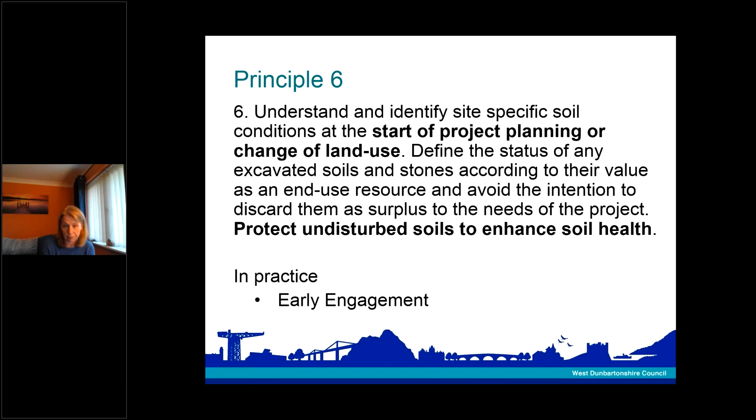The other principle which I think definitely applies in our sector is Principle 6. The initial plan when working on the principles was to include an infographic as part of the notes, but it was felt it was a bit too prescriptive, so it was taken out. But there are notes for each of the principles that go into more detail and explain more what this refers to. I think my biggest bugbear is that often we see material being excavated because it's not geotechnically suitable.

We then have the issue of this material then having been assessed to find a suitable use, or worst case, a use being found irrespective of risk. But with a bit more attention, it could be that this material could be treated in situ, and therefore there's no need for large-scale excavations in the first place.

I think the other thing is that with a bit more thinking, different material can be used for different purposes. The problem arises when the end use has not been properly defined, so all material needs to comply with the most sensitive end use. As a regulator, we're often accused of being the ones that expect the soil to be of the best quality. But the reason for that is because people aren't willing to put a bit of effort into where the material is going to be used. So we have to assume the most sensitive end use.

So wouldn't it be better to manage this - if a bit more thought about management and handling of materials would mean that different soils could be segregated for different uses?

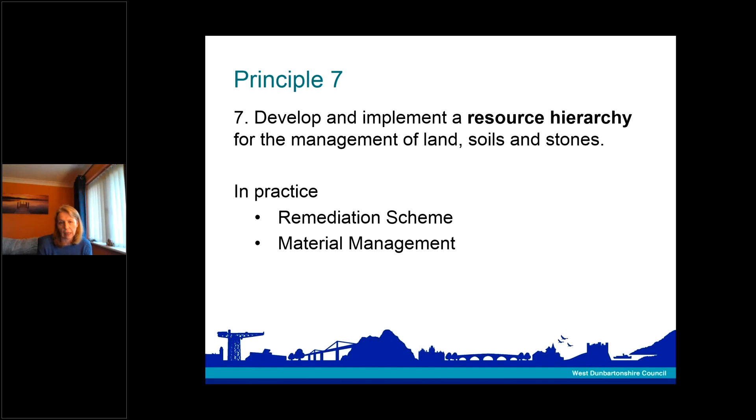I'd really encourage everyone to look at the 10 principles and identify where they think they can make a difference. So by way of conclusion, I bring you back to my rather bizarre title, Mountains or Molehills. The fact of the matter is, it doesn't matter - no matter how much soils and stones we're dealing with, we need to remember it is a resource in its own right. As a fellow colleague once said, we need to stop treating it like dirt.

I hope I've demonstrated how I'm trying to make a difference in West Dunbartonshire, and would encourage others to do the same. While globally our approach may be negligible, and even nationally we've still a long way to go, having webinars like this is a great way to spread the word, and I hope I've provided you all with some food for thought as to what we in the contaminated land sector can look to do.

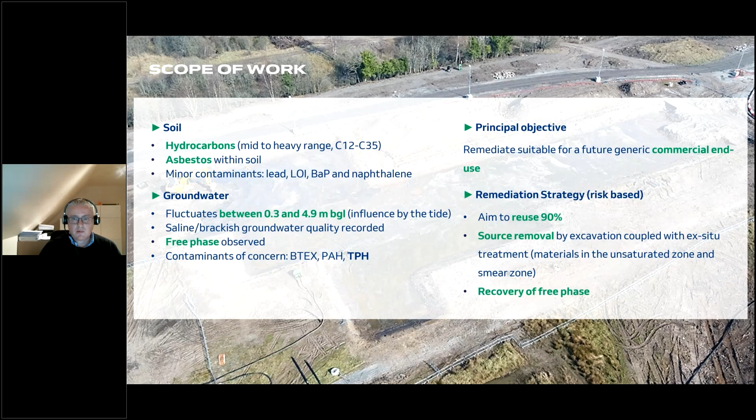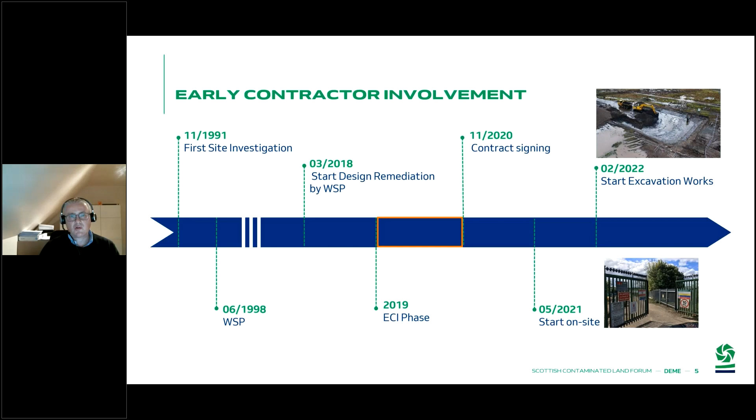Often today, contractors receive the tender documents, we have to price them, there are some discussions with the client, and hopefully we come to contract signing. This project is slightly different. In this project, we were awarded an ECI phase contract, an early contractor involvement.

A lot of you are probably aware of early contractor involvement. It's the involvement of the contractor in the design of the project, and we work together with the consultant and the client looking for the best way to remediate the sites. For example, we support the client with volume calculation.

As a contractor, we put a lot of focus on evidence-based remediation. What I want to say is that we want to prevent subjective criteria as much as possible, because in this project we had a visual criterion. But if we are walking on site together, for you soil will be clean, for me it will be dirty, and the other way around. So we want to make the criteria as objective as possible.

So we developed in the ECI phase some additional testing to make those criteria as objective as possible, and presented them to the authorities for approval. On site we have a hard criterion, for us about 9,600. And as mentioned, we also had a visual criterion. But by defining and developing the leaching test, we can now decide, based on the test, if a certain soil matrix needs to be treated or not.

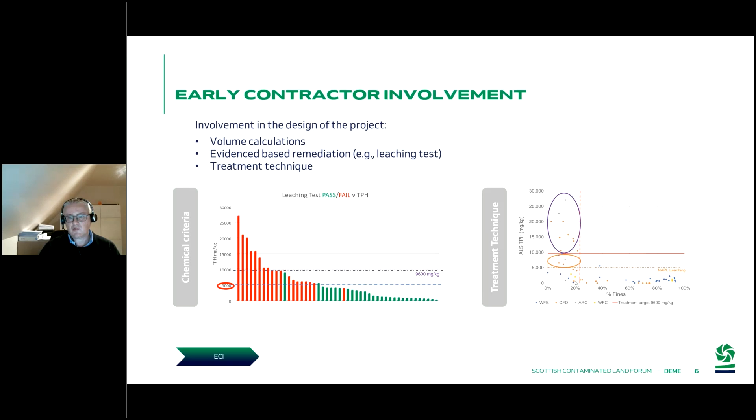Last but not least, we supported the client with choosing the optimal treatment technique for the works on site, doing additional testing on site. From that data, we could see that the pollution was mainly linked to soils containing up to 23% of fines. That was the fingerprint and the proof that a soil wash technique was the best or ideal technique on this project for the treatment of the soils.

Of course, we can promise a lot during the early contractor involvement, but during execution we need to verify, validate, and demonstrate that our processes and procedures are working, and working well.

So on this remediation project we have an on-site lab with continuously 2 to 3 full-time equivalent people working in it. I call it my R&D department. They are really the heart of the project. They do the sampling, perform the tests, and provide the operational team with the data, allowing us to decide in the evening or during the day what we need to do with the soils, if we need to treat them or what we have to do.

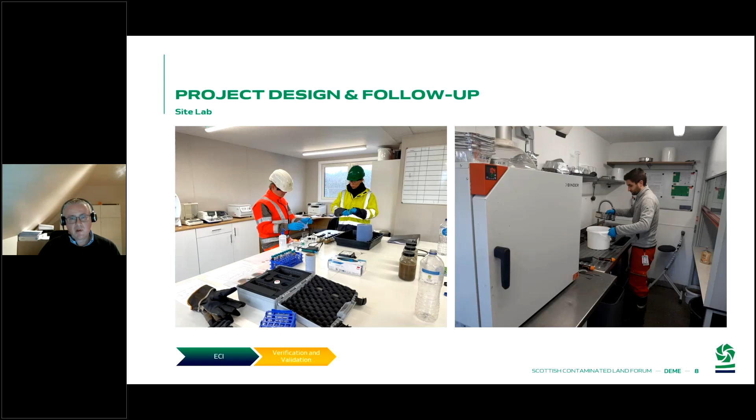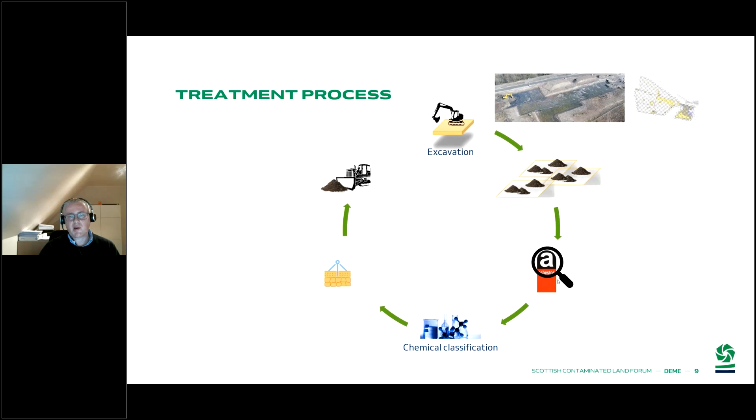At the end of the ECI, ideally you come up with a treatment process. For this project, we split the complete site into a grid of 20 by 20 meters, excavating the whole site in these grid cells. We bring the excavated soils to a platform where we store the materials in stockpiles of about 100 cubic meters, take samples, and analyze the materials, first of all for asbestos.

If the asbestos concentration is above 0.1%, those materials are disposed of; other materials are reused on site. We also do the chemical classification, and based on that, we decide what soils need to be treated in the soil wash plant. On this project we also have an additional criterion linked to geotech, so we have a plant on site that allows us to stabilize materials if they are not okay to be reused or backfilled. And finally, of course, we are backfilling the materials on site.

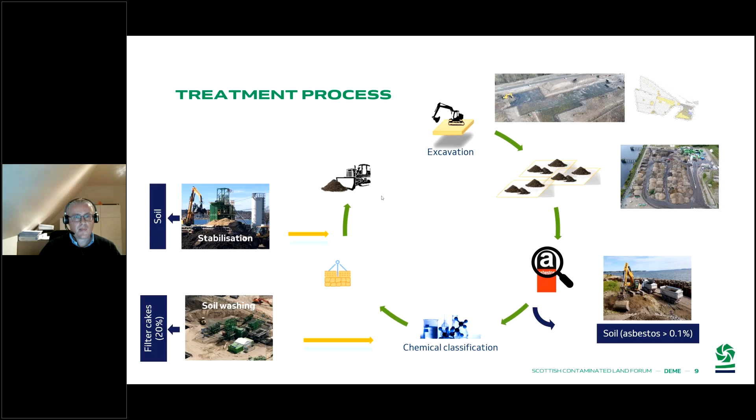Here, the coming slides are some pictures of the remediation project. You can see it's a rather big site we are working on. The total surface of the site is 60 hectares, including mudflats, but about 20 hectares are subject to remediation.

You can see here in the front our platform where we store all the stockpiles, and as well where the treatment plants are constructed. In the beginning of 2022, we started with the remediation of the western part of the site. You can see here a picture of that part.

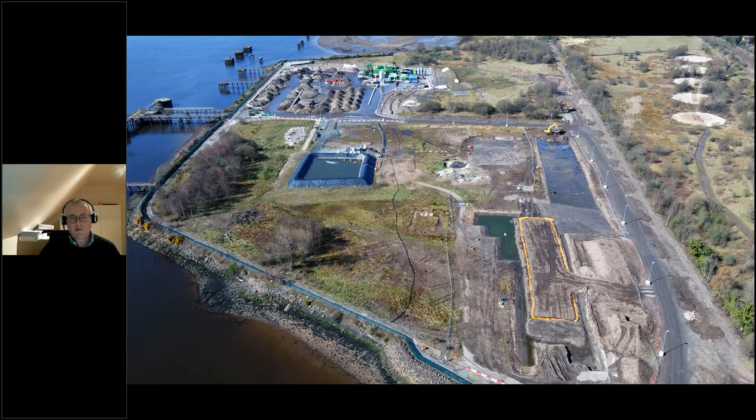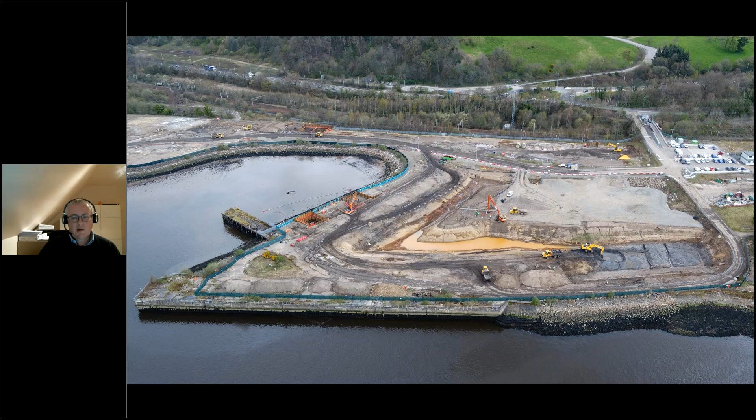Here you see a picture from somewhere at the end of 2022, beginning of 2023, where we were mainly focusing on the eastern part of the site, the remediation works of the eastern part. And this is now a picture from very recently, maybe 4 or 5 weeks old. This is how the site looks today.

So today we are mainly focusing on the remaining part of the eastern part remediation, and as well the remediation of the revetment and the old quay wall. So we are excavating the complete structure and reconstructing a new revetment wall.

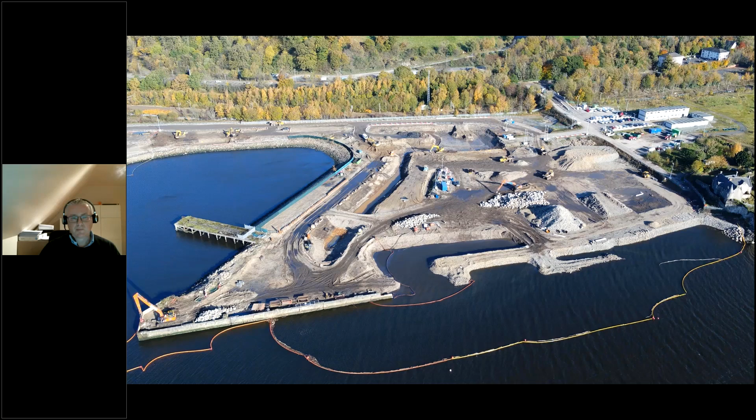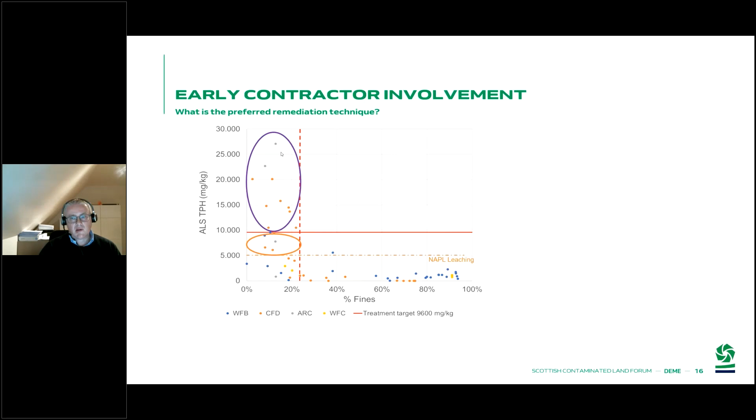Zooming in now into the soil wash plant - what is it, you have seen this figure already. Based on this figure, we decided that soil washing was the ideal technique. Why? Because soil washing is actually nothing else than a separation technique. 95% of it is actually based on the separation of particle sizes.

So basically we're taking a soil and we are screening it, and we are recovering gravel, sand, and the finer fraction, which is the silt and the clay fraction. We have as well some units which are focusing on density, units that are removing the ferrous materials. And then you have some processes, but those are minor - it's adsorption, abrasion, and dissolution.

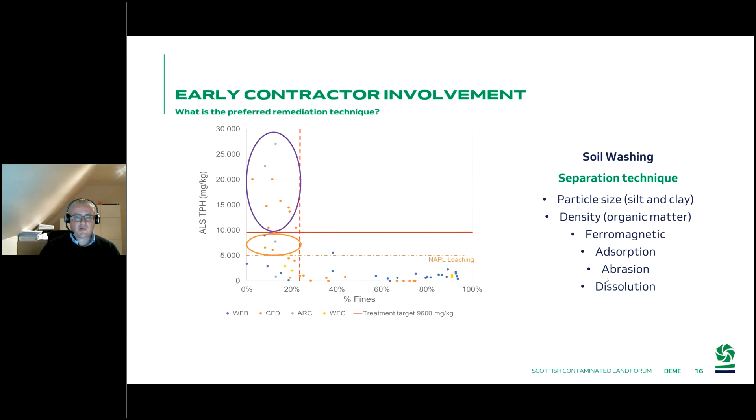So if you look now to the process, here is a picture of the plant itself on site. You can see here the soil wash plant. It's all modular units, so we can bring them to every site that you are busy with remediation. This is the soil wash plant, and you see here in the back as well a rather big water treatment plant, a treatment plant that can deal with about 200 cubic per hour.

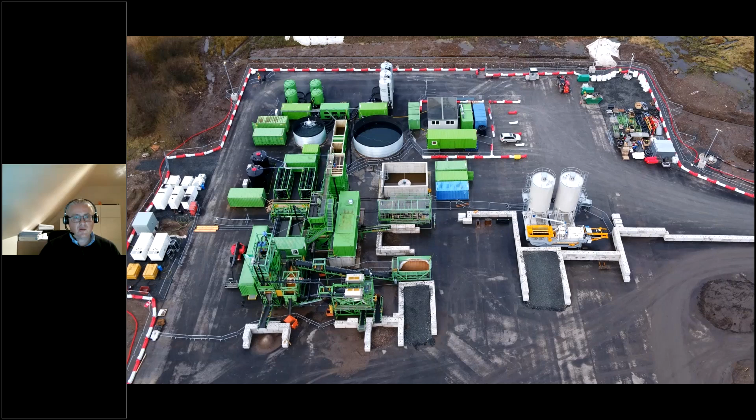Zooming in into the process itself. So if we have a stockpile, 100 cubic, that we say chemically now we need to soil wash it, or we need to treat it, the material is brought first into an input hopper, where the material is then conveyed by conveyor belts into a wet screen unit. On top of the conveyor, we have a magnetic belt where we are removing the ferrous materials.

Materials coming onto the wet screen, the material that stays on top of the wet screen, that's the bigger sizes, that's the gravel. The gravel is then going to the gravel washer, and of course the result from the gravel washing process is clean gravel. By washing the gravel, often we see that organics are linked to the stones, or small roots, or whatever we find in the matrix. So here we have a dewatering screen where we recover the organics.

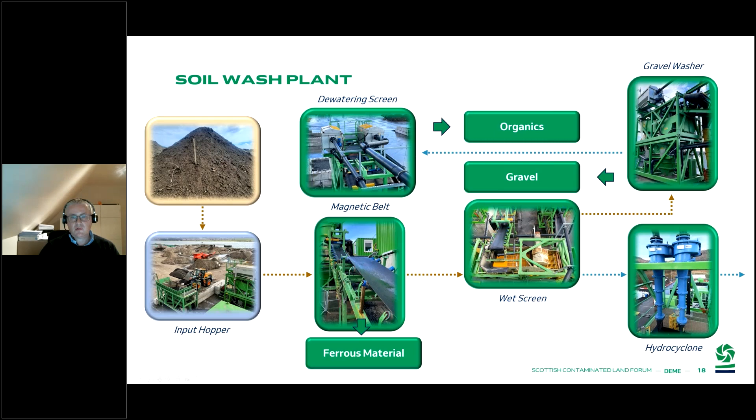Meanwhile, all the fines - the sand fraction, the silt fraction, and the clay fraction - that go underneath the sump of the wet screen are pumped to a hydrocyclone. A hydrocyclone actually separates the sand and the silt fraction. The sand fraction is pumped to an upstream clarifier, which is actually a polishing step where we remove the last fines that are sticking to the sand fraction. Then the sand is pumped over a dewatering screen to dewater it, and we have then clean sand.

The fine fraction, the silt and the clay fraction, are pumped to a lamella separator. It's a very big tower, and we are using some polymers to make flocks, allowing them to settle into the lamella separator. From the bottom of the lamella separator, we are pumping the material to a dewatering unit - that can be a belt press, it can be a chamber filter press, but for this project we've chosen a decanter centrifuge. There we generate what we call filter cakes.

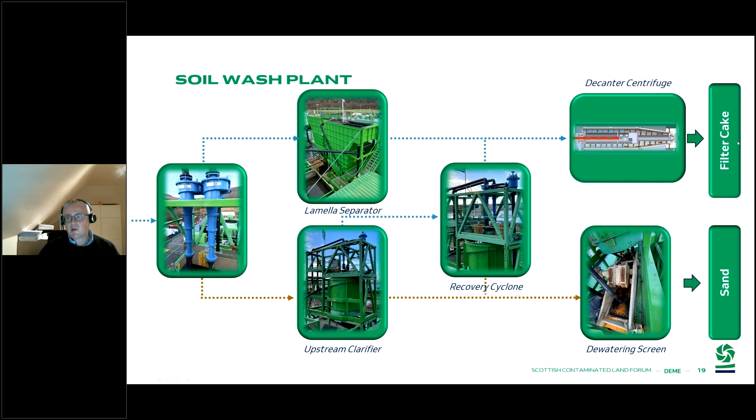As you will see in the next slide, those are roughly the output materials of the plant we have. So we have clean gravel and clean sand, and we have then the pollution which is concentrated up in the fine fraction, the silt and the clay fraction, which we call filter cakes - this fraction needs to be disposed of and cannot be reused on site.

And we have the water, of course, and it's a lot of water that is pumped through the installation, but that water is treated on site before it's pumped or discharged into the River Clyde.

If you look to the reuse, what is the impact? About 23% is filter cakes and needs disposal, but we can reuse 10 to 15% of the gravel. So that's the matrix that goes in. And the biggest part actually of the material that goes in is the sand fraction, so that's 62 to 67%.

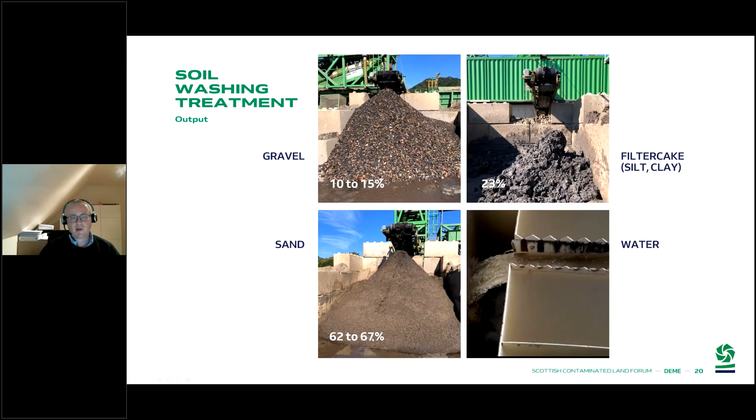Summarizing this in a few numbers, on-site treatment: so we treated up till now, and by the end of the project it will be about 150,000 tons of materials. If we would have transported that off-site for off-site treatment or disposal, that would correspond to about 6,000 trucks, but we were able to keep them on site and treat them on site.

Focusing on the treatment efficiency, it's more than 90%. What do I mean with treatment efficiency? The material that we put into the system has a concentration between 5,000 and 40,000 milligram TPH per kilogram. The quality that comes out of the plants is in the hundreds of milligram per kilogram.

So as mentioned already, you saw in the previous slide that we need to dispose of about 23%. So of the soil wash material, we can recover and reuse about 77%. And if you look to the overall mass balance, because we have to excavate as well some clean materials before we reach contaminated or polluted ones, the overall mass balance on site shows at this moment that we are reusing about 90 to 93% of the materials that we excavate, which is quite significant.

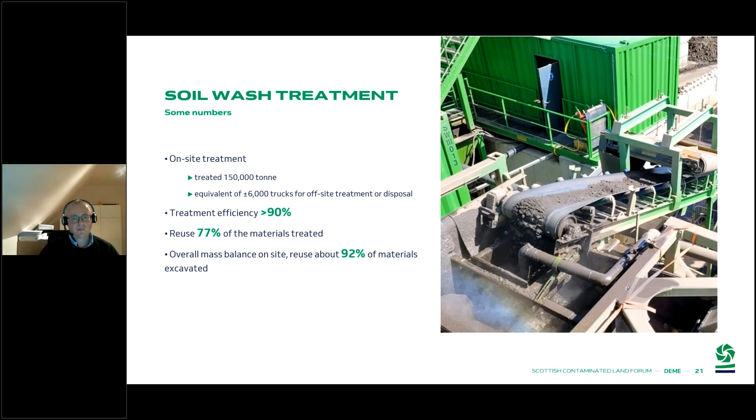Now focusing a little bit on the data management. It's a long project, it's a big project, about 2.5 years. So we are excavating quite some soils, about 475,000 tons. We are backfilling as well, 440,000 tons. We are soil washing, or we will soil wash about 130,000 at the end of the project. We are stabilizing about 90,000 tons, treating water as well, now about 330,000 cubic.

So that means a lot of streams that we have to handle and control on site, which implies a rather thorough data management system. If we look to the project, we will take approximately 5,000 samples, execute 20,000 tests, issue about 12,000 reports, and on the whole project we have about 30,000 registrations. What is a registration? It's actually an entry into the data system that we have.

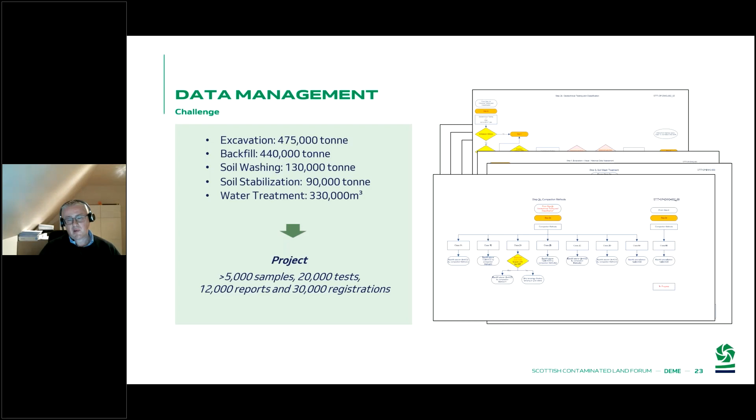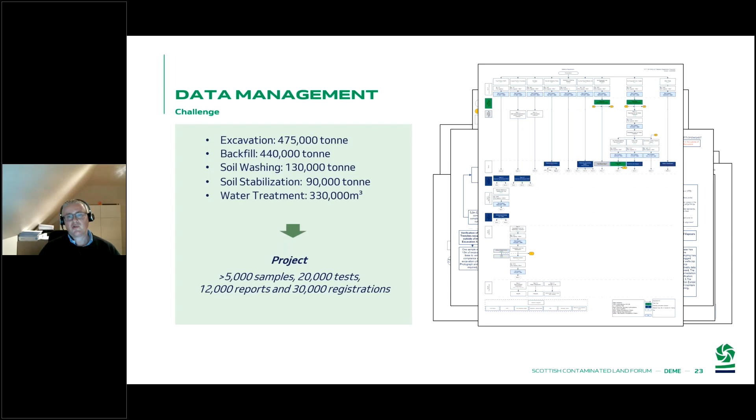So all this requires a lot of discipline, and that needs to start already from the preparation phase of the project. So what we are doing, when starting up the project in the preparation phase, is translating all our processes that we have on site into a flowchart. We check as well what inputs and outputs we have into the system, and we arrange already unique labels, unique codes for every input and output.

How does it look then during the operational phase? Here you see a schematic of how the data management system is working. I mentioned before that you are excavating in grids of about 20 by 20 meters. Each excavator has a GPS system, so he knows perfectly in which grid he is. That information he gives to the dumper driver, and the dumper driver gets as well information about the quality that the excavator operator is excavating.

All that information is captured and collected. If the dumper is full, he drives to the platform. First of all, he's passing by the weighbridge, so we are registering for every movement the weight of the material. And as mentioned, we are sampling the materials in stockpiles of 100 cubic. So if we reach 100 cubic in a stockpile, the dumper operator gets the message that the stockpile is full, that the stockpile is closed, and then a unique code, a unique label is generated for that stockpile.

At that moment, the R&D department receives a message that they should come to the platform to perform the sampling for the further chemical analysis. So all the data that we collect from the chemical analysis, both from our on-site lab as well as from the external lab, because all the validation, sampling and testing needs to be done by a third party - we cannot do that on site. All that information is collected in our database and recorded. In addition, as well, all the treatment processes.

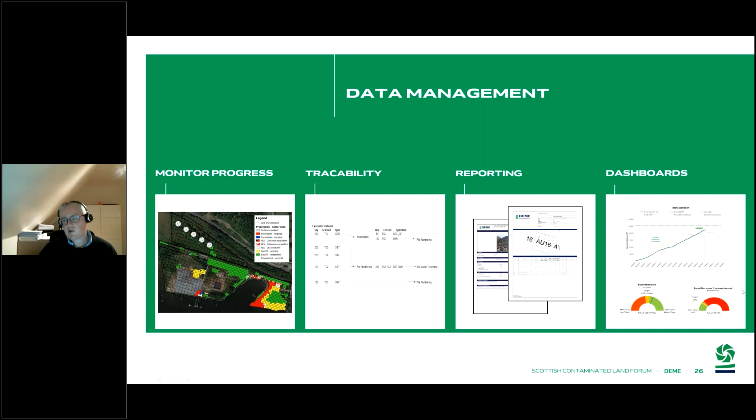And last but not least, of course, the dashboards which are very important for us. It allows us to follow up production, monitoring certain parameters like excavation rate. This information is shared with the client, the regulator and authorities. For example, here you see a dashboard which is important for the client because it shows how much fines or filter cake we are producing at a certain moment, because this is, of course, a rather expensive output.

So that's my presentation. Thank you very much.

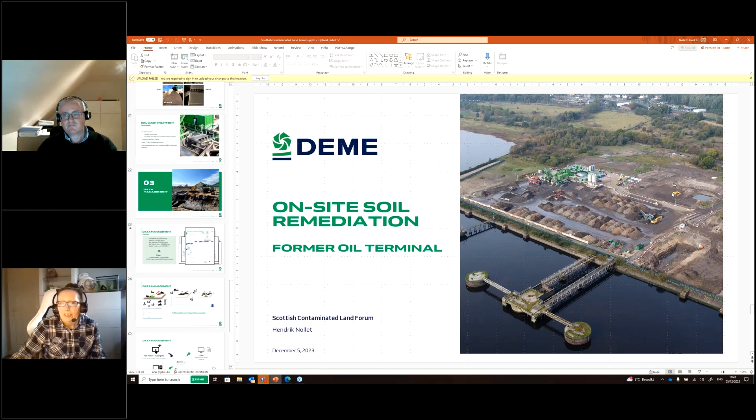That was great, thank you very much Hendrik. It's great to see that site actually progressing so well. I was brought up not very far from there at all. So yeah, it's great to see. So next up, we've got Gavin.

Just 1 minute Gavin, I'll get you made a presenter. No problem, that should be you. No. You should be able to try and share your screen. That should be me now, is it? Not quite. Yeah, that's visible. Right, am I just not seeing it for some reason? Everybody got that? I can't see it for some reason, I don't know why. I can see the slides, we can't see Gavin. Yeah, he's not got his... Yeah, I'm struggling with Scottish Borders internet, so I don't have a camera on. So as long as you can see the slides, that's the main thing. Yeah, I can see as long as that's as long as everybody else can see it, I can't. So okay, go ahead.

Fine, thanks to Sarah and Hendrik. You've both managed to pretty much keep to time, which is fantastic. So when I did a run through of my presentation earlier on, it was a little bit over, so I'll try and cut it shorter. Fortunately, I don't have to do much of an intro to myself if the biographies are going to be shared.

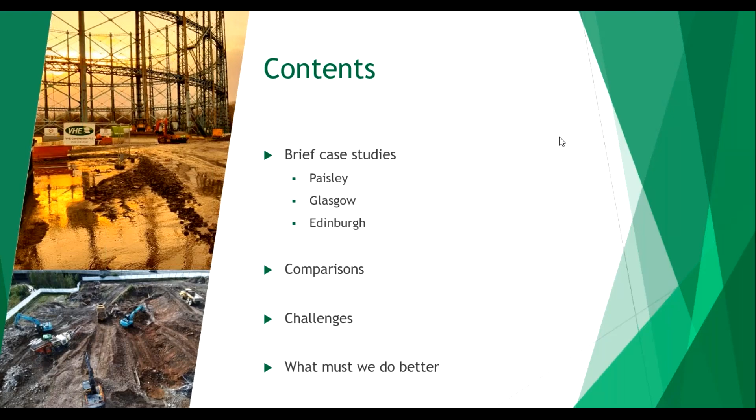Before we start on the projects, I just thought it was worthwhile for those who perhaps aren't as familiar with the anatomy of a gas holder as they might be.

These are predominantly below ground gas holders. You'll see in the picture on the top left-hand side of the screen, we have a frame structure that sits above ground. In all 3 of these cases, these frames were actually listed as part of our industrial heritage, which does add an element of complexity to filling the holder because we have that frame to work around.

Within the holder, as you can see in this picture, there's a large domed structure in the center, called a dumpling, and an area around the outside of that dumpling, which we call an annulus. I thought it was worth explaining some of these terms so that as I use them nobody thinks I'm talking about my dinner tonight — we are talking about the structure of the holder. So that gives you an idea of what they look like before we start to take them apart.

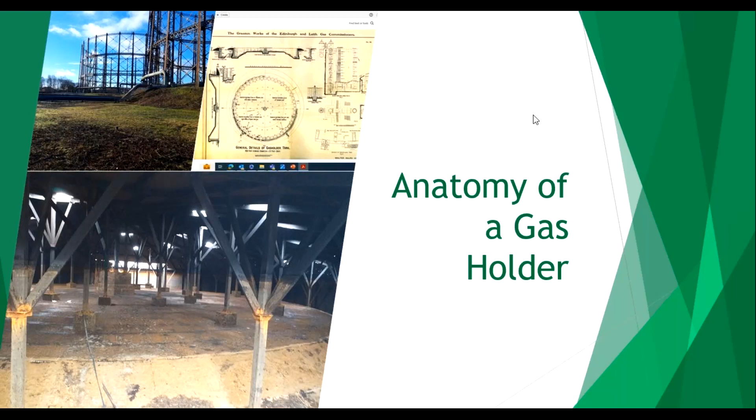Moving on to Paisley, I've run through Paisley first for a couple of reasons. First, chronologically, this was the first of the projects undertaken. Secondly, and probably more importantly, this highlights how things are done when timescales are tight.

We weren't able to use as much recycled material as we wanted to achieve the client's objectives. I'll apologize, I'm going to run a time-lapse video to let you see the process, which then explains the process on the later holders, so it jumps around a little bit. This project ran into COVID lockdowns, so we had to do some clever editing of months and months of inactivity. But I'll run this just now.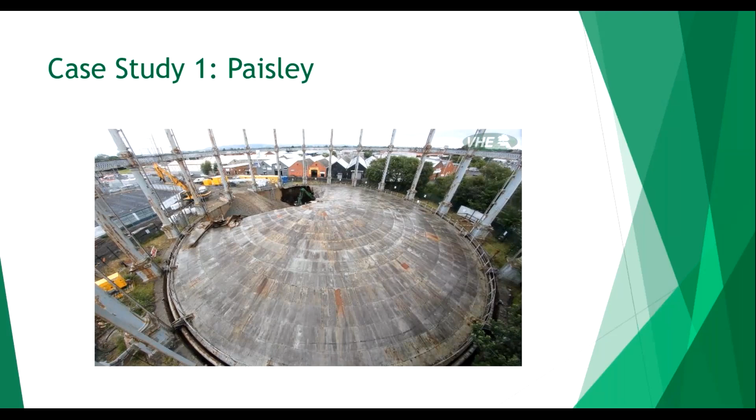This will give you an idea of the process. We start on the top of the gas holder by removing a small section of the roof — you can see that just up in the top left — and can then start to infill a ramp. Because the frame is listed, we can't access the outside of the holder all the way round about, so the roof is taken off in sections and processed on the top of the dumpling.

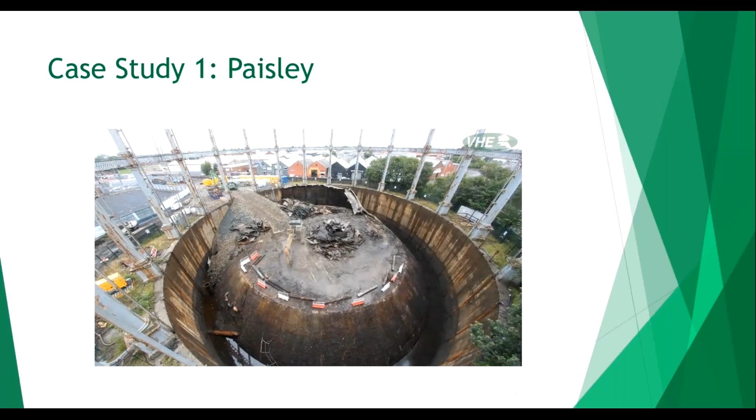Then we take the walls down, in 3 or 4 lifts — these are big telescopic structures. That material, scrap and generally contaminated timber, is all processed, sorted and taken out.

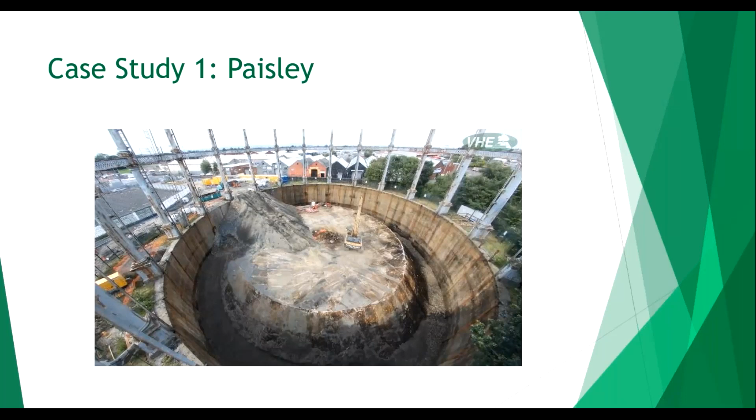We then start the operation to clean the base of the annulus so that it's ready for the infill. We then start to use the long reach excavator to start placing the infill, and it's a fairly slow, delicate operation. This holder was done over a working period of about 3 or 4 months.

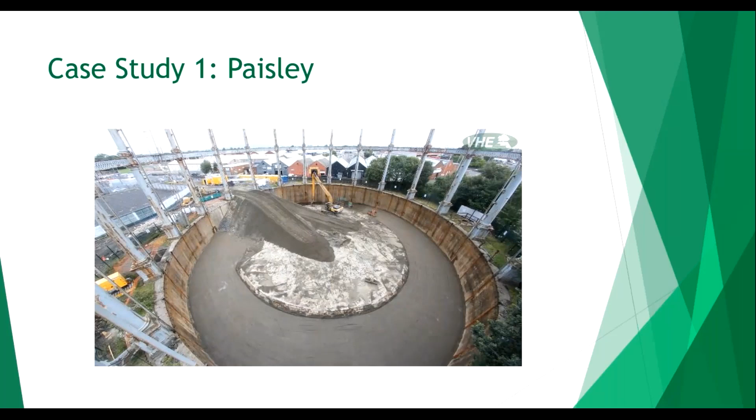The material is brought in, filled up to level with the top of the dumpling, and then we start to construct the second ramp to allow us to take that first ramp out, clean the material underneath there, and then fill off to the top. You can see some of the remnants at the top right there.

Once that's done, the balance of the holder is filled in, and then we put a capping layer on top to leave a space that's usable for the client, or in this case, the site was sold.

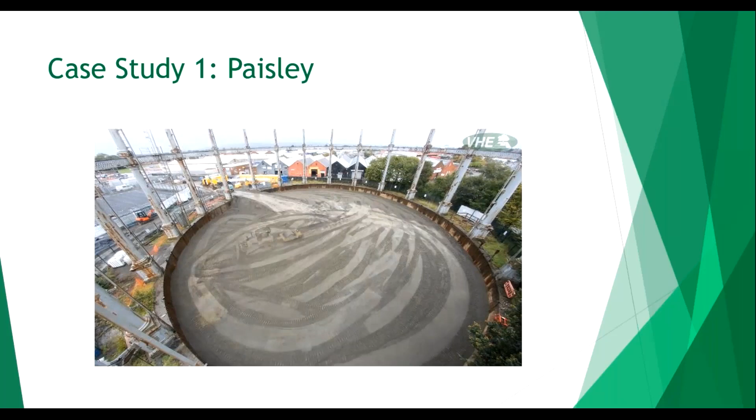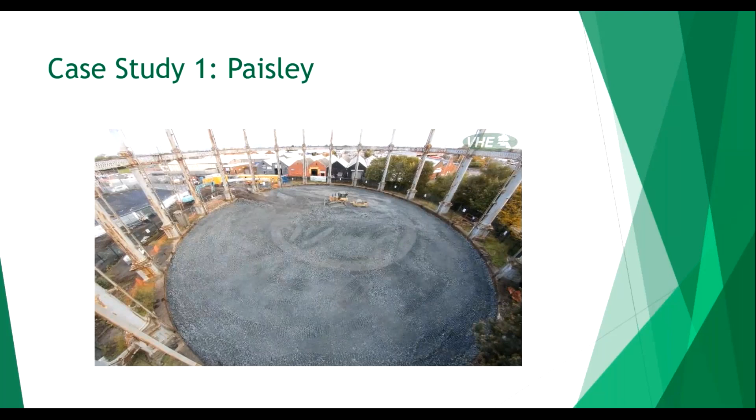This site was predominantly done with quarried infill. When you see the little table I have at the end, you'll see that mainly we were buying virgin quarried products, which isn't really obviously what we're thinking these should be done like.

Moving on to Glasgow, Glasgow was slightly different. We didn't undertake the demolition ourselves; a demolition contractor came in prior to us.

What we had in Glasgow was a clay dumpling rather than a concrete one, as you saw in the last one. And as part of the demolition activity, that dumpling had actually collapsed, so some work had already been done.

We like to fill these with a slightly domed structure so that they will shed water to the sides, and we don't end up with a large swimming pool that gathers it so we have to pump it out. That's really preparation of the surface to allow the infill.

We then process the infill, compact it before putting a capping layer on top, and leave a nice slightly domed surface.

This project, slightly differently from Paisley, there wasn't a purchaser for the site at the end, so we had time on our side. The material into this site was actually brought in under a waste management license rather than a paragraph 19 exemption, which I'll discuss the differences of later, but it allowed us to use waste material to fill the entirety of the holder.

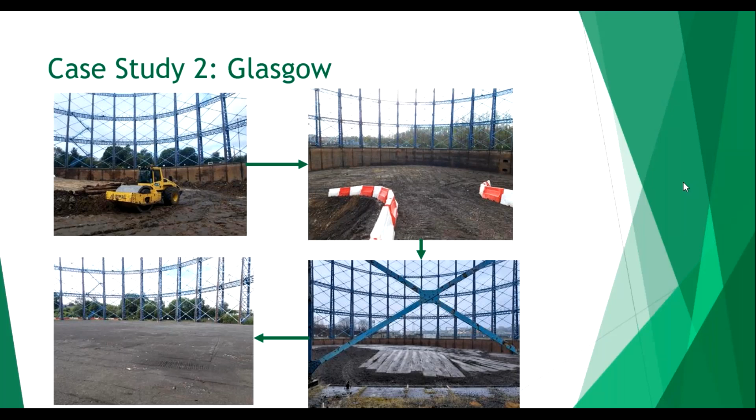What became quite apparent is that, in terms of the reuse of soils, there's only a certain distance soils will travel before people deem it uneconomical. While the furthest site was just short of 25 miles away, the bulk of our material, circa 90% of it, came from other brownfield redevelopment sites within 3 miles of where we were looking to fill.

The advantage we had there was that we were able to undertake the licensing, which meant we could fill the entirety of the holder with effectively surplus and waste soils from other sites, which is obviously a model that we should be looking to recreate.

Moving on to Edinburgh, this is a project we're currently involved with at the moment. Hopefully, fingers crossed, we see some decent dry weather and can get this finished off, but we've about 2 or 3 weeks further to go to fill this site in.

Slightly different on this site in that we've had a lot of site-derived materials that have allowed us to infill the bulk of the gas holder.

Some negotiation was required with SEPA beforehand. Effectively, the Greater Granton Gasworks site had a number of stockpiles which fell outwith the red line boundary for this particular development of the gas holder itself, and they had been there for a considerable period of time.

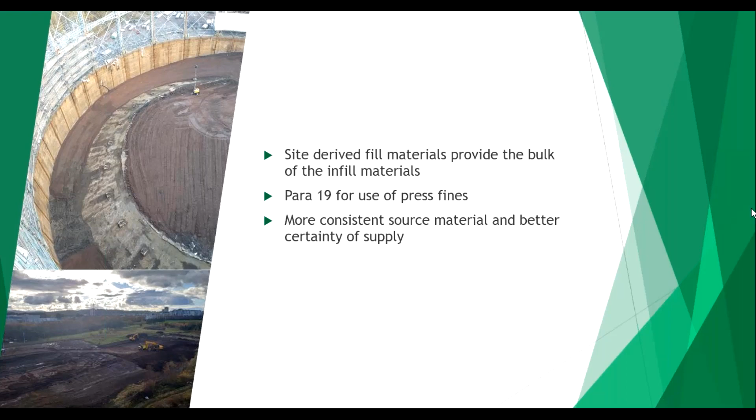In terms of the three projects, Paisley was very much driven by the client's requirements. They had a purchaser for the site. It was a fairly small holder, relatively speaking. We only needed just short of 13,000 cubes of material to fill it. So we did put a paragraph 19 in place to maximise, if we could, the reuse of waste soils from other sites. But what we found was, partly driven by COVID, but also by the materials available in the marketplace at the time, we struggled to get suitable recycled or imported materials from other sites. So a very large percentage of the material that went into that holder ended up being primary quarried material.

Glasgow was done under a full waste management license, so we were able to fill the entirety of the holder, bar the capping layers, with recycled material. The capping layer itself was a recycled 6F5, and the couple of hundred cubes of material we imported were really just where we needed more robust stone for repairing haul roads and constructing ramps, and that final dressing surface that we saw.

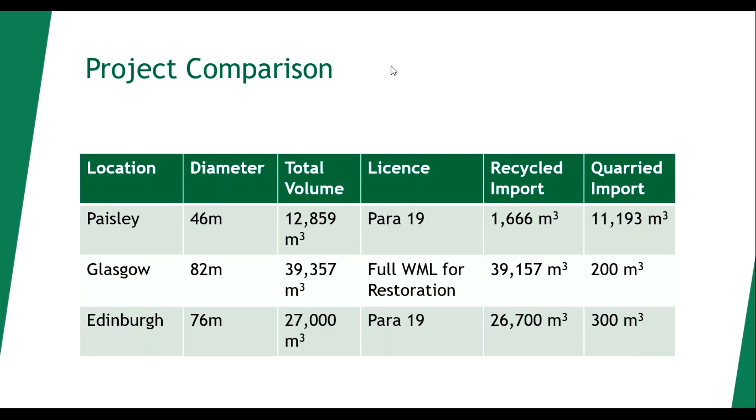In terms of the challenges, as I'm sure everybody would like to see, analysis assessment of the source sites - very often we were being sent site investigation data and in disposal terms it meant we had a lot of parameters that weren't covered. We generally had leachability criteria applied, which was often not done at the source sites. On a couple of occasions we had the flexibility and time to get further analysis done, but on others where the window for obtaining the material was so narrow, we effectively had to take that at risk, base our decision making on the analysis we had, and fill in the gaps as the material came in and got placed.

The 2 metre thickness allowable under a paragraph 19 does present a challenge when infilling gas holders, probably increased by the nervousness out there from regulators about placing waste material at depth. With gas holders it's not quite so much of an issue, because to maximize the volume under that 2 metre thickness, we would generally place material above the top of the dumpling, which is then shallower. But certainly that is an impediment to filling the entirety of these void spaces, and on another site where you are perhaps excavating material with infill requirements, the 2 metre cap can limit the volume you can import under a paragraph 19.

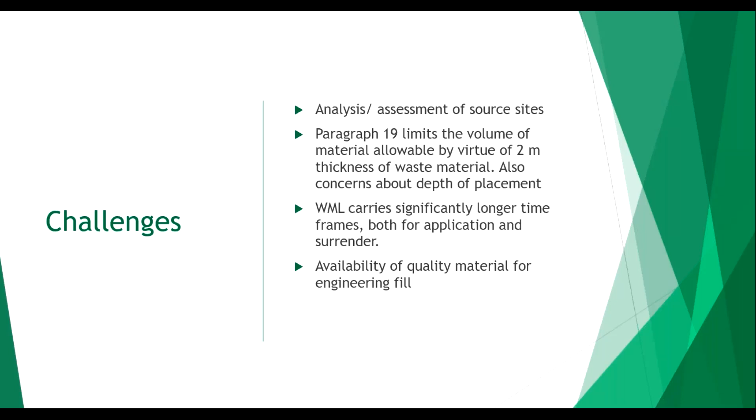In terms of what we could do better, and finalising - none of these will be a shock to anybody - but the initial site assessment is key. Once sites have determined they have an excess of material and will have to remove it, having an eye on the disposal options and what we're likely to do is very important, rather than just hoping that disposal points or reuse centres will take it based on the assessment.

Project timing - we're talking about large scale earthworks, and while project timing can't always be controlled, attempting to do these things in periods of drier weather can greatly increase the chances of using materials as engineering fill rather than sending them to landfill. So that's very important.

Regulatory discussion - it'll be music to Sarah's ears to hear me say as a contractor that dealing with the regulators and getting them on board with what we're looking to do has been vital, certainly in the later two case studies. I mention SEPA here because as the body licensing the operations we've undertaken, we found the application process in Glasgow was fairly slow the first time around as they came on board with what we were doing. But down the line, as we moved into Edinburgh, we were dealing with the same people - they knew the process, were much more on board with it, and it was far smoother. That has made the process easier as we finish off these sites.

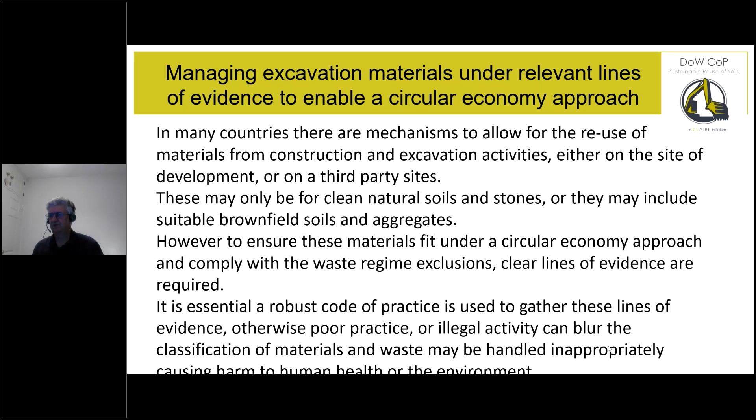Otherwise, if we don't have those lines of evidence, we either have illegal activity or poor practice can blur the line between illegal activity and reuse of materials under the circular economy. And then we can end up with situations which are certainly not beneficial for the environment and potentially harmful to human health as well.

So it's key that we work together under a best practice approach. The purpose and scope of DoWCoP was initially set up to enable soils reuse on predominantly brownfield sites, to enable the brownfield regeneration that was pushed for in the early 90s and through the 2000s.

Dealing with some of those issues that we had, certainly with paragraph 19s and other types of permit. The Environment Agency actually developed the original Definition of Waste Code of Practice for greenfield and brownfield sites in 2006. That was then brought forward by CL:AIRE, acting on behalf of industry, to bring forward version 1 of what we now know as the DoWCoP, and then version 2 subsequently in 2011-12.

It's based on your land quality assessment process, what we call in England the Land Condition Risk Management Framework, published by the Environment Agency. This is similar to schemes across Europe and elsewhere in Australia and so on, where you have a desk study, a site investigation, remediation strategies, and then earthwork strategies and so on. But they're done under a risk-based approach rather than just a hazard or waste-based approach.

Certainly the DoWCoP is all about good practice, but as I mentioned earlier, key is marshalling those lines of evidence to show that you've got a clear audit trail, that you're not discarding materials, so you're not dealing with waste materials. You're aligning to the Waste Framework Directive requirements, which are to ensure protection of the environment and no harm to human health and no detriment to amenity and so on. But you're doing that with these tracking systems all the way through.

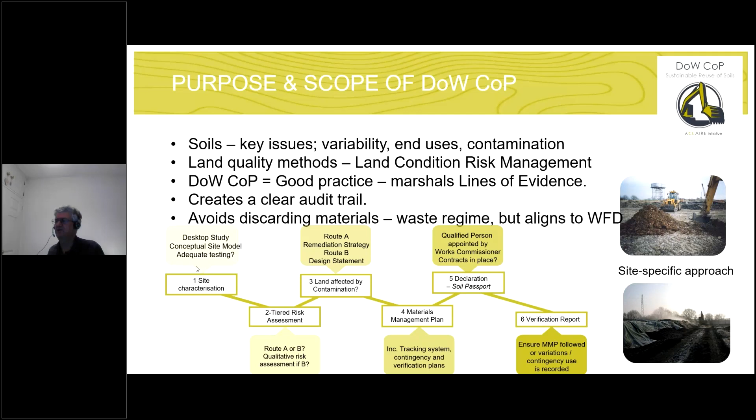Key thing, as has been mentioned on some of your projects, there is the planning requirement, and that usually relates to validation of remediation activity. But for the DoWCoP, the verification report is about the materials used and confirming that the materials were fit for purpose, either from the point of view of chemical criteria or, as already mentioned in some of the treatment activity you've heard about in the previous talks, from a geotechnical point of view. And they've got to meet both of those, and those criteria relate to the site-specific requirements of materials.

Using source segregated aggregates, so that might be sub-base from roads and so on, but it's already pre-existing on the site and suitable for reuse on the site.

The cluster projects are about use of materials where you have to do a treatment activity, and obviously when you're not using them on site of origin, they have to go to a treatment facility. Now that treatment facility, as we've seen today, can be on the same site where the materials are dug up, but in this instance we're talking about materials being treated and then sent off site for reuse at an alternative site, or they can be at the receiver site where you treat the materials having brought them from the original donor site.

The only thing we don't do under DoWCoP for transfers between sites is source segregated aggregates, because we have the quality protocols for aggregates in place for those materials, which if you transfer them off site should go through that factory production process and become non-waste materials through that route.

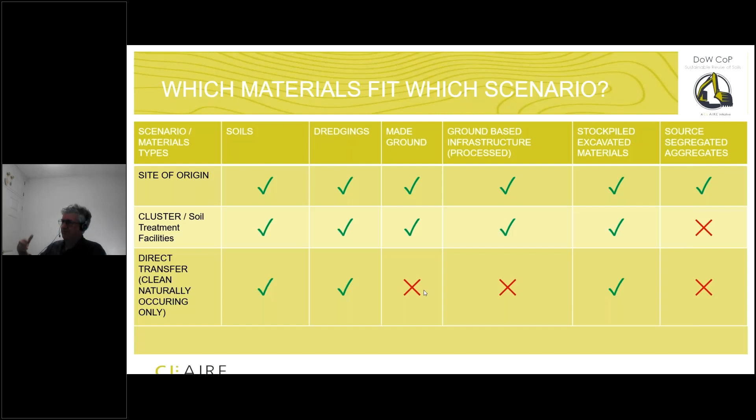Direct transfer, again, is for clean, naturally occurring soils and dredgings materials that are excavated on one site and then transferred for reuse on another site. But that is only for clean, naturally occurring materials, similar to the exclusion to the Waste Framework Directive on site of origin. You're not allowed to use other made ground, ground-based infrastructure, and source segregated aggregates in that way. So this is very much the picture we're looking at.

We're trying to get people, as we've discussed already today, to make that mental shift from viewing excavated materials as a waste and a thing to be got rid of, to actually looking at how can we use that material, where can we use it on site, can we transfer it to another site where there's a need for materials, and how do we avoid discarding it so that we don't create a waste material that is then going to a landfill site.

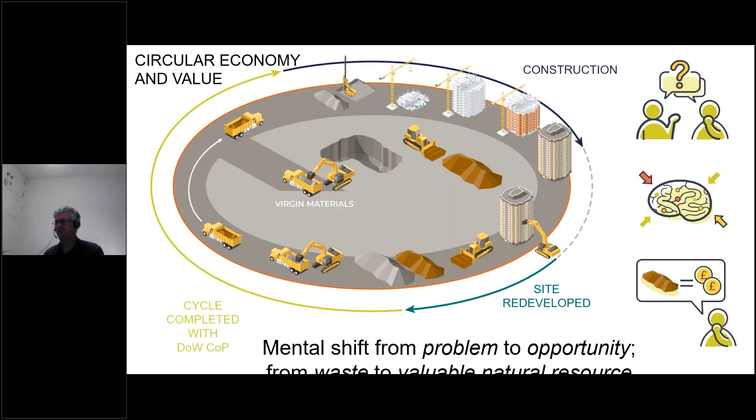Soils, particularly today, World Soil Health Day, are a valuable natural resource, and we need to make sure that we're using them as best we can, and that requires this sort of mind shift to a circular economy approach to dealing with soils, in the same way that we're trying to use that approach to dealing with other things like metals and so on that we've been doing for many years.

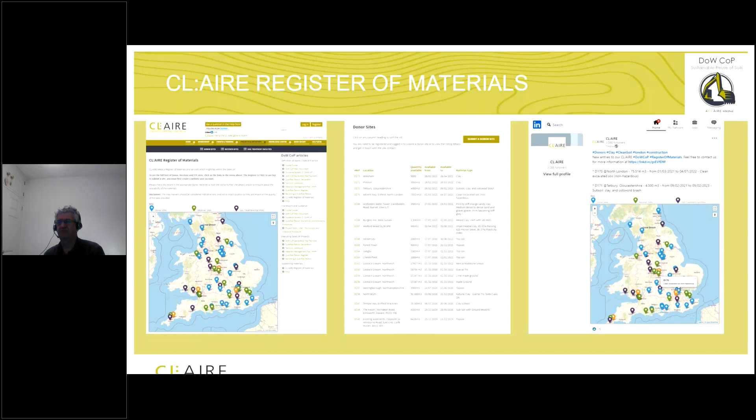CL:AIRE helps that process with its register of materials, so you can register your site if you've got surplus materials, or you can register a need if you've got a requirement for materials, and the web pages help match those up so that people can have a transfer of materials between sites.

It's very much about working in a good practice way. The project collates the relevant documentation, preferably thinking about soils from early site investigations and early design processes. Then you have the qualified person check. Then CL:AIRE processes the declarations and issues the soil passport or soil receipt, declaration receipt. We keep things in a secure internal database, and we've got the regulatory liaison processes built into the DoWCoP scheme.

And we're also doing audits. We do both paper audits of sites that have completed, to ensure that they did actually complete in accordance with the plan.

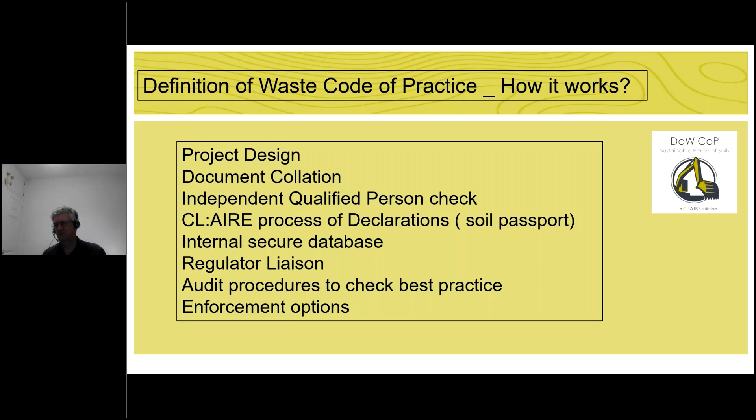And we also are beginning to do site audits. And we have relevant disciplinary procedures available to us if we find that either QPs have signed off something they shouldn't have done under the scheme, or projects haven't followed the plans submitted to the QP, or haven't followed the materials management plan. So there's a check process in place there.

It's really about making sure projects' design accounts for soil balancing in soil resource plans, and that feeds into other documents produced recently, the CIRIA soils and stones document, but more importantly the coming DEFRA soil and stones document that will replace the one issued in 2009.

I understand that'll be out in early next year. And then CL:AIRE will actually produce a companion guide to that, because we wrote the original basis of that document, which will be a fuller document with more background reading on soil science and a more robust approach to the evidence lines.

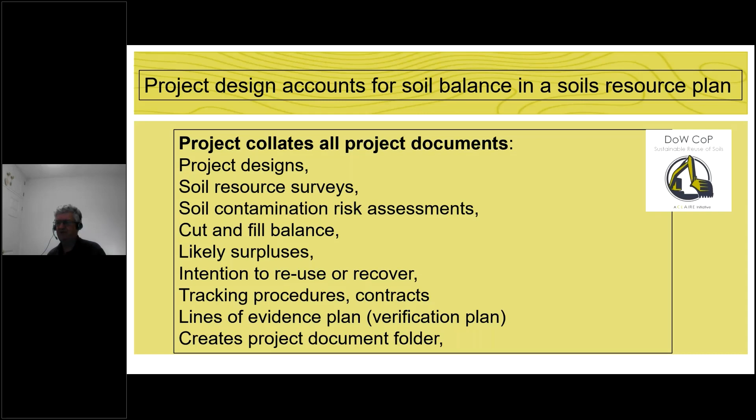But it's all about making sure you've got the right information to make good decisions about what you're intending to do, and that you have tracking procedures in place. If you end up with stockpiles that become dumping grounds, or stockpiles near each other blending and mixing materials on the edges, then you haven't got a quality product. So stockpile management and tracking procedures, taking the relevant samples to create lines of evidence for your verification report, as outlined in your verification plan, all go into creating a project document that people can follow.

The qualified person is very much an independent role. They can't be linked to the project, they can't be involved with writing the reports or anything like that. They can be in the same company, but shouldn't really be linked to the project in any way. More often than not, they're not. There's over 200 qualified persons at the moment in England and Wales who carry out this activity and are suitable for the role, having met the relevant criteria, having the right qualifications and experience, passed an examination, and are chartered, continuing their professional development process.

All of those things are required for a QP to become registered with CL:AIRE as a QP, and then to act in that capacity to sign off declarations. They assess that all the relevant documentation in the materials management plan, all the bits that sit under that overarching portfolio of documents, meets good practice and relevant legislation requirements. If that's the case, they can submit the declaration about the reuse of materials as materials rather than as waste. And this is the simple declaration.

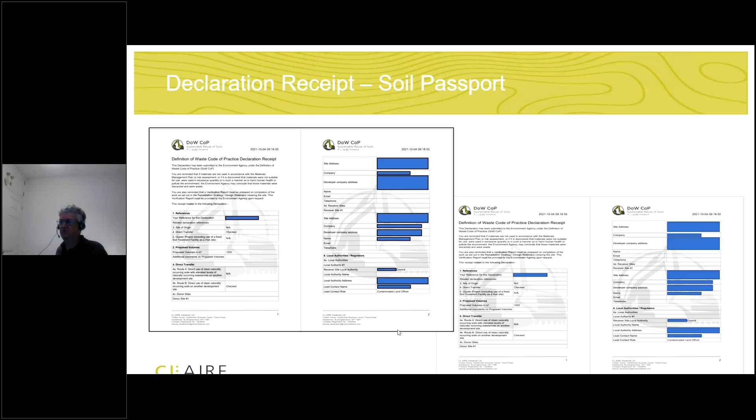Basically, once that comes to us, we check it, and then we send out what we call a declaration receipt, or for the international version, the soil passport. And that enables activity to commence on site.

So it is a leading international framework. We've done a lot of work in lots of countries. We've helped Canada develop their soils processing legislation. We're working with Greece and others to try and develop similar schemes there. But although the principles are based at the moment in England and Wales, the whole scheme is based on the requirements of the EU Waste Framework Directive.

So in many countries, particularly in the British Isles, you will have the same approval setup, the same regulatory setup, and therefore there's no real huge barrier to using the DoWCoP approach in other jurisdictions, providing you get the agreement from the local regulator and can match it into local regulations that are maybe subsets. For instance, in Ireland they have a subset of soil regulations. In Scotland, I think there are some soil regulations about transfer of clean naturally occurring materials. The DoWCoP will enable that materials tracking process and validation process to be robust, and perhaps give everybody confidence in the way things are currently being done by good projects, but perhaps not by everybody in the way they could be.

So the opportunity is there to enable projects to use the DoWCoP in other jurisdictions and to show really robust evidence that projects are following a circular economy practice, and therefore increasing the sustainability of construction, not just in terms of reducing traffic movements between sites or off-site for disposal and then on-site for bringing in virgin aggregates.

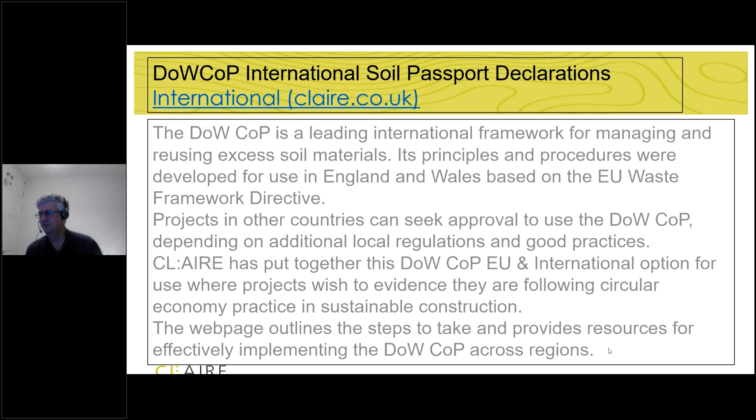We heard earlier from Hendrik, I think they say 6,000 lorry movements. That's not just lorry movements or disruption to people on the roads, it's also all those CO2 emissions from lorries and so on. So a circular economy approach to materials management, under schemes like the DoWCoP, is critical to us moving forward to meet those principles that Sarah outlined earlier, and that we have under the Sustainable Development Goals. So it's really important that people look at the best practice available, and perhaps this is an opportunity to use DoWCoP across a wider piece than we do currently.

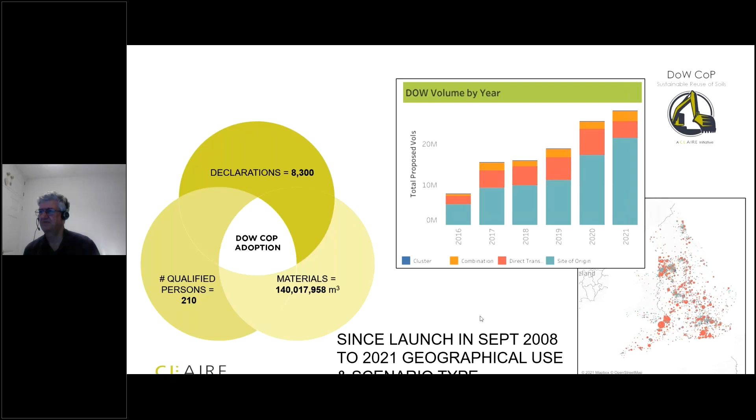As I say, we do carry out audits, both paper audits, which I've shown a summary of here. Generally speaking, projects are acting pretty well, and we've got a few that need to improve bits and pieces in terms of their documentation. We don't have that many currently showing that they're falling outside the scope of DoWCoP, but we have disciplinary processes in place with the regulator if that is found to be the case, to bring those projects to book, and if necessary pass them on to the regulator or indeed HMRC to reclaim landfill tax for materials that haven't been deposited appropriately under the scheme.

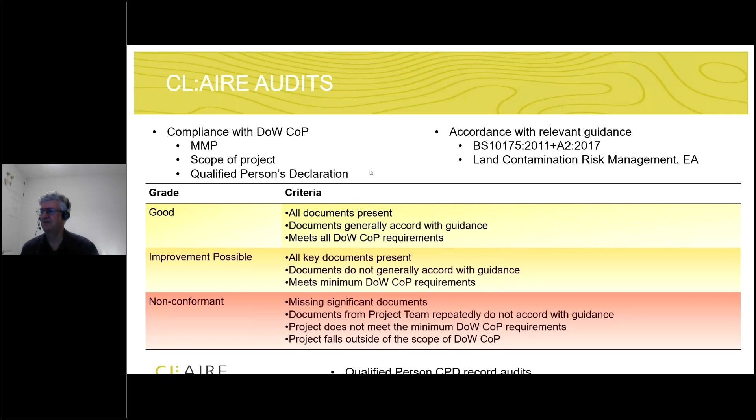It's very much about working with regulators as much as we can, and the DoWCoP system works with regulators when they're doing that. It's a best practice mechanism, and it sits under existing planning permissions. So what we're saying is you don't need to double regulate. If you have a planning permission with remediation strategies and soil management conditions, you don't then need to have waste permits, in our view. That's a view that's been expressed by the Environment Agency.

The Environment Agency wrote the original document, the Definition of Waste Code of Practice on greenfield and brownfield sites, in 2008. That developed out of work I was involved with for the Channel Tunnel Rail Link, now commonly known as High Speed 1. That was about reusing materials on site in the most pragmatic and sustainable way, and that's what really initiated some of the Definition of Waste Code of Practice approaches.

So it enables a regulatory position to be taken on the reuse of materials rather than falling into the formal permitting scheme. The last speaker was talking about 3 to 4 months to get a permit in Scotland - that would be brilliant. In England, many people would say that would be fantastic. I'm afraid in England it's taking 12 to 18 months to get some of the disposal and recovery permits required for construction sites.

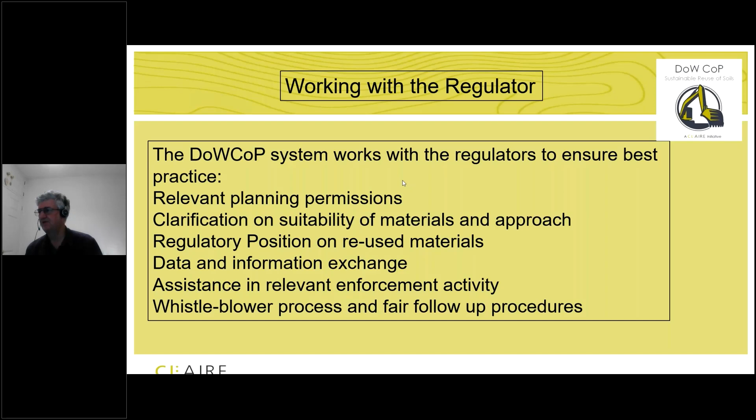So we can help with relevant information exchange and assistance in following up any enforcement activities that might be needed. We do have these whistleblower processes and fair follow-up procedures for disciplining those who perhaps haven't quite followed the practices they should do.

It's been mentioned that Hendrik's project really showed how digital is coming into the construction industry, how to make things transparent and workable, and show that everything is being done to a quality process. Digital is certainly the way forward, and from our point of view, although digital waste tracking is coming in England and Wales in the not too distant future, we're saying let's not wait for that. There's no reason, with the software available at the moment - and Hendrik showed they've got something in place - that you can't be digitising these activities now, so materials tracking can be done by electronic means, and that helps us all move towards higher standards and ensures that on-site auditing is also much easier.

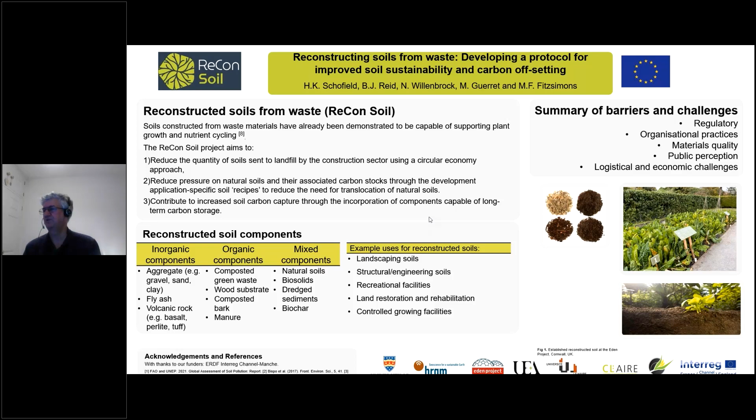One of the other things we're looking at is where do we go next. We've been partly involved in an interreg project with other parties, looking at whether we can use other wastes to manufacture materials suitable as growth media in landscaping, land restoration, or habitat rehabilitation. The French partners involved, and Eden Project too, are looking at growing media for particular crops or plants, where your soil mix needs to be specific to enable certain plant growth. So that's pretty much it.

I've galloped through that a little bit, just wanted to give an overview. We do full days awareness training on what DoWCoP is, and we can do QP training. Hopefully at some point we'll be able to come up and deliver some of those in the north. With the international soil passport declaration available now, we hope it could be used north of the border as well as south of the border and in Wales. That's me.